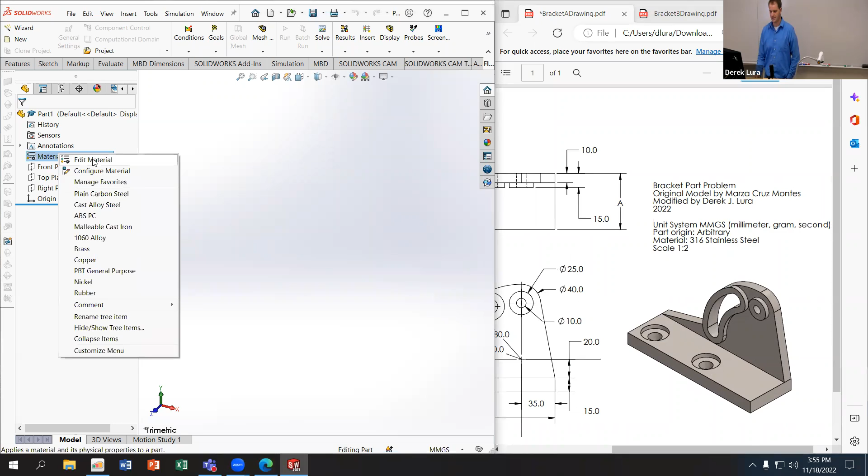That's great. I'm going to go ahead and change my unit material to stainless steel. I just want to get those things out of the way as early as I can. It doesn't say if it's sheet or bar, but they have the same density, so I don't really care. I'm just going to use bar. Makes more sense than sheet in this case, I should say.

I'm also given an ABC dimension inside the quiz, so whenever you're given that, you definitely want to use your global variables. I'm going to go into equations and specify that A is 55, B is 170, and C is 15. If you wait and do that later, you're going to suffer because you won't have the dimensions when you want them. That's all the setup that I need.

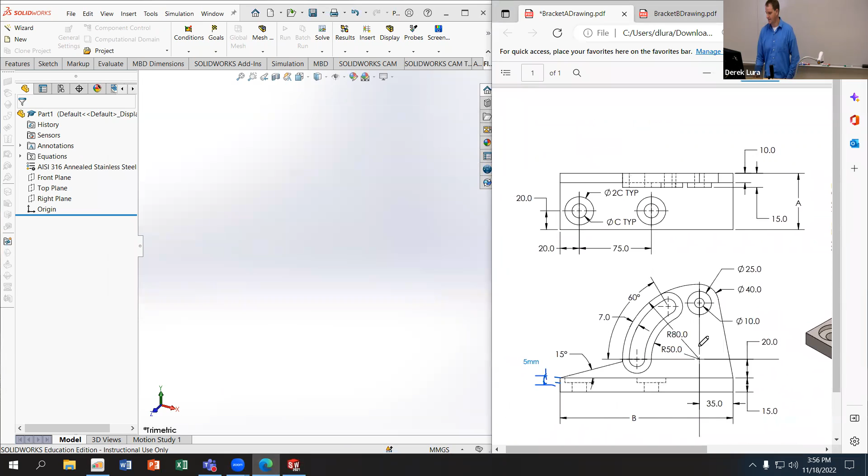I like to start by making very simple geometries. In the bottom here, I have a box that is B by 15 by A.

I'm going to go to the front plane and sketch. I'm going to use a corner rectangle to draw the width, and specify the width as B. So equals to—make sure you use the equals to. If I don't use the equals to, it's not going to save that as an equation, and I won't be able to update the dimension in the future, at least not automatically using my equations.

The height is 15, and I'm actually going to go through and mark these off as I get them, because I don't want to use the dimensions more than once if I can. I'm going to extrude this to a width of A, so equals to A again. In this case, since I don't have any symmetry here, I'm not going to bother changing this to midplane. I know I want all those back walls to line up, so I'm just going to leave that as a blind extrude. Again, I'll mark off the A on here.

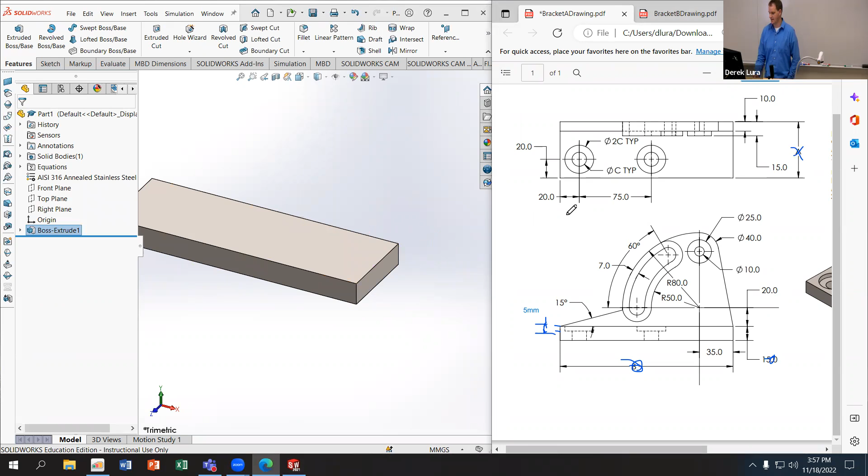Then I'm going to start working on this upper, more complicated geometry. I'm going to go back to the front plane and sketch on the front plane. I'm going to start on the left side and just work my way across.

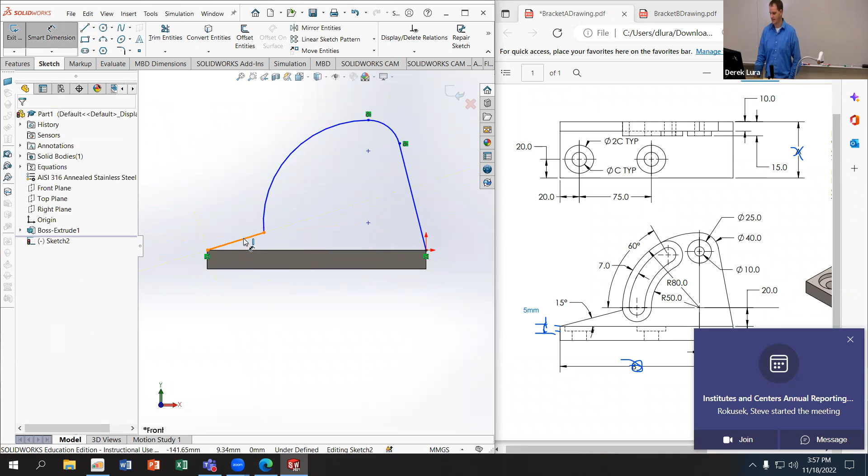So starting with the line tool, coming up, I'm going to try and transition to the arc. There's an arc there. I'm going to try and get to another arc—there's the other arc there. And then I'm going to come across to close that off. That's the basic shape. I have the 15 degrees here, so we'll get that. Mark that off.

I have an outer radius of 80, so I'm going to specify that this radius here is 80. I've got a smaller radius here of 40, so I'll specify that as 40. I do want to try and put these dimensions in the same spot as they are given to me in my drawing. It makes it easier for me to check and see which ones I've done and which ones I haven't.

I've got the center of this arc specified. I've got 35 over and 20 up from the top of this rectangle, so I'm going to specify that the center of this one here is 35 over and 20 up. So try and get that here. Then I'll mark these ones off.

Let's see here, what else do I have? I know that one's 40. Oh, I know I want the centers of these two circles to stay lined up, and currently they're offset. So I'm going to try and get these two centers to line up vertically, and I know that because they're both on top of that same line there.

That says fully defined, but it does not look correct. What am I missing, or do I have something wrong? This is 40... oh, that's diameter 40. It should be radius.

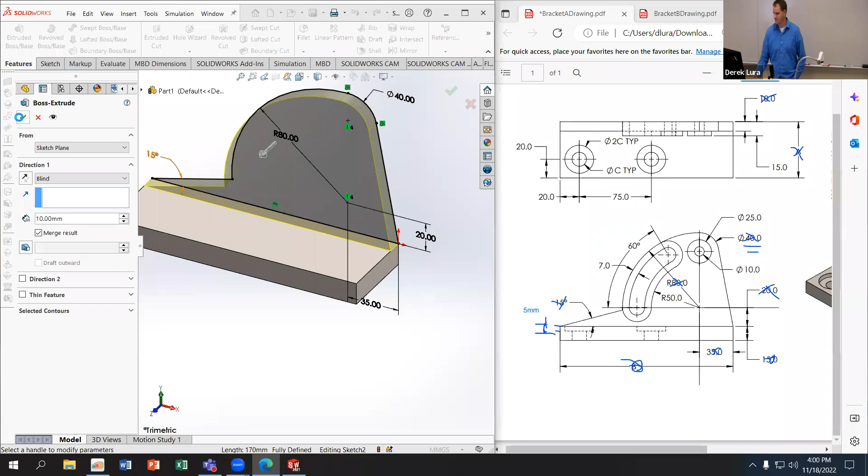I need to close off the bottom because this is not a closed cross section, so I'm just going to convert this bottom line. Then I'm going to extrude this to a width of 10 millimeters. Mark that one off there, accept that, and now I can start putting these slots and holes on here.

I'm going to go from the front plane again because I have this width is 15, so I want to be able to type that in without having to do any kind of math. So I'm going to sketch on that one.

This complex feature here is really just a curved slot, so I'm going to use a center point arc slot. I'm going to get the same center as where I started from, and I'm just going to draw this out. Oh, I want it to go the other way. Something like that. And then I'm going to add the relations to this to get it set up.

So this guy and this guy are actually co-radial, so I'm going to get that last arc and this arc here, and if it'll let me... there we go, co-radial. This bottom point is horizontally aligned with the center.

So I'll get those two points. I'll try and get the point first. Maybe let me do it that way. Doesn't like it, doesn't like to give me that because of the slot tool.

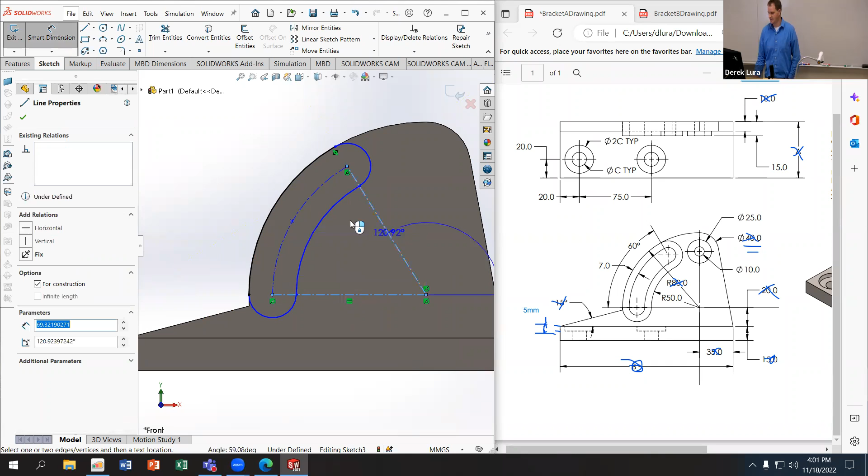What I'm going to do is make a center line that goes from here to here to here, and then I'll use that center line to allow for the horizontal relation. So make that horizontal. And then I also have a nice line there to use for this 60-degree angle. There's my 60, that's pretty nice.

This inner radius here has a radius of 50, so I'll specify that this is an R of 50. I already specified the 80, so I don't want to do that one again. There's my 50, I use that. There's my 60, I use that.

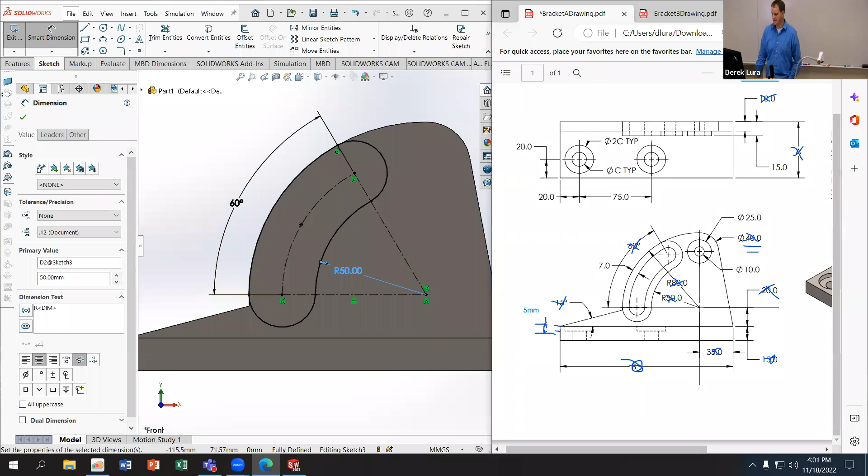Then I'm going to go ahead and extrude this to a height of 15. I'm going to go to features, extrude, 15 millimeters from the base, accept. I'm going to click on that, and I'm going to sketch on this face.

I'm going to do an offset of 7, and I'm going to reverse it so it's coming in. Then I'm going to use that to do an extruded cut, having it go all the way through. Again, the only dimension I use there is the 7. I can mark that one off.

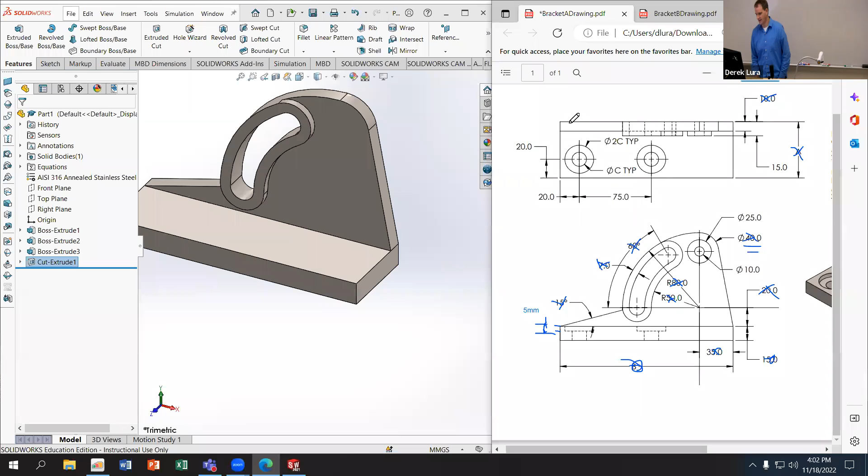I've got this hole up here on the top, same basic setup. Go to the front plane, sketch that hole. Actually, I'm going to sketch the outer portion of it first, again making this co-radial with this arc.

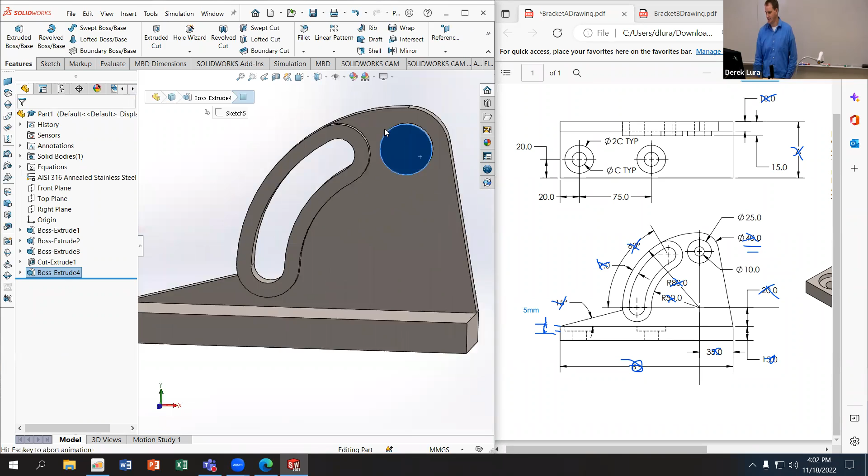15 again - remember that SOLIDWORKS is going to save your properties, so if you used an extrude of 15 on the previous extrude, the next one you do is going to be 15 by default. So if you can put all the same size extrusions in the same kind of timing, it's going to make it easier for you to save a little bit of time there.

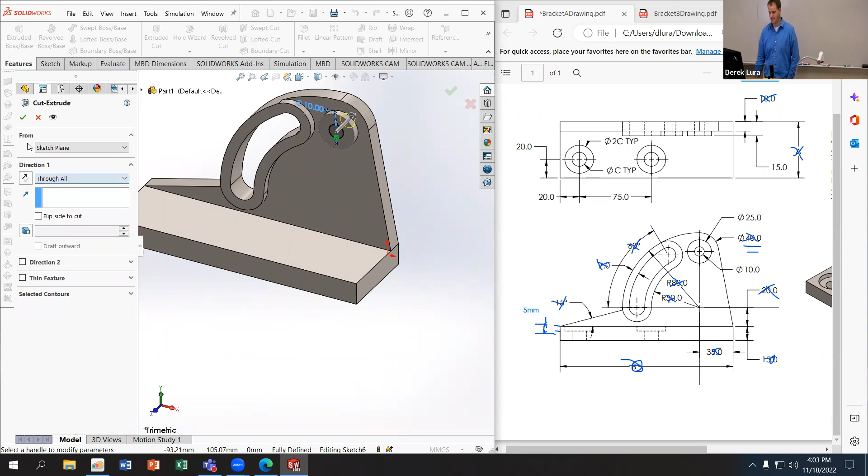And just sketching that hole, cutting the hole out. Then I'll do the bottom circles here, so I'm going to sketch that. I'm going to do a circle 1, circle 2.

Specify the positions of these. I didn't cross off my dimensions on that yet, so that's 20... 20. And 2 times C in diameter, so it equals the global variable C, oh not B, C times 2.

And then I'm going to make the other one horizontally aligned with that and equal in size. That TYP means it's typical - it means that's the typical size of that part. So if you see typical and there are two features that look like they're the same, then they're the same.

I'm going to cut extrude these to a depth of 5 millimeters, which I didn't actually include on the drawing - apologize for that. And then I'm going to sketch on this new plane, and we'll get those concentric with my original circles as well.

And they are going to have a diameter of just C, so that equals the global variable C. I'll make them both equal as well, rather than adding the same dimension twice.

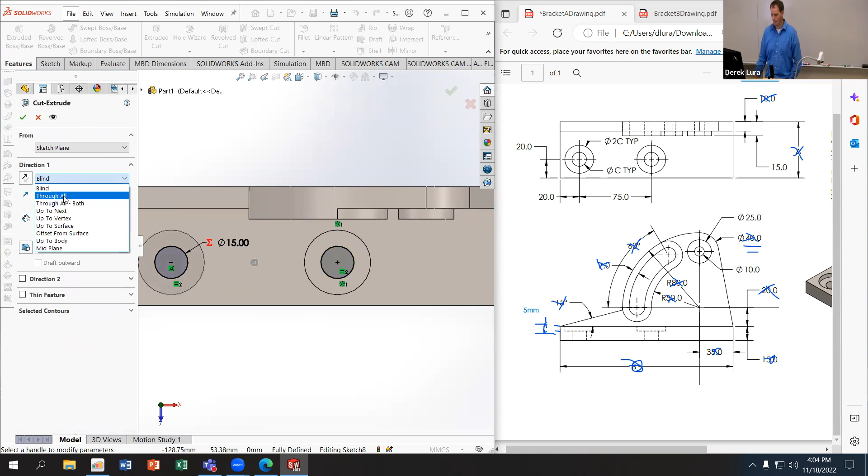So again, I've got the C dimensions here, the 20, the 20, the 75. I know I'm not being very good at marking these off as I go. The 15, the 25 for the outer circle there, and the 10 for the inner circle there. I've used all my dimensions. I've got my part done.

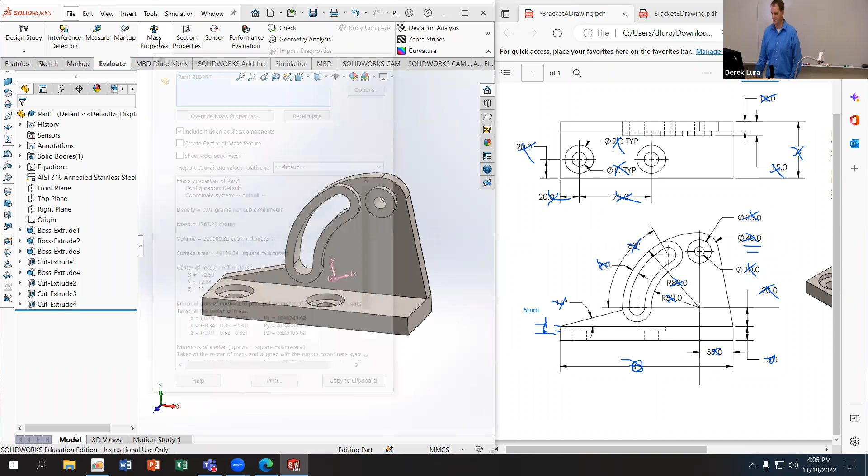I should be able to evaluate mass properties, and I get 1767.28. And I can compare that to the options. Looks like it matches one of them.

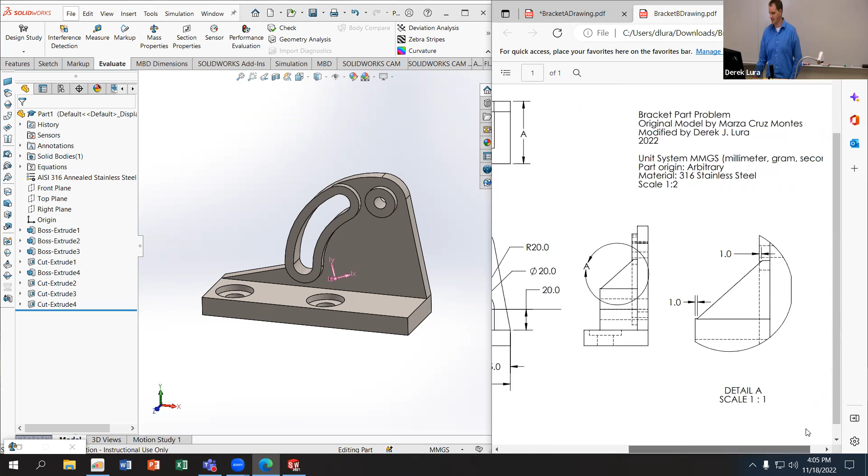Go to the next part. So I'm going to go back to the new drawing. We're just adding a feature to this, and we're changing our ABC. So if you're changing ABC, check that first - this is going to be the first thing you want to do, just so you don't forget.

Because once you start modifying the part, it's very easy to forget to go in and make some changes. So I'm going to change this to 184 and 10. You guys will all get different values for B.

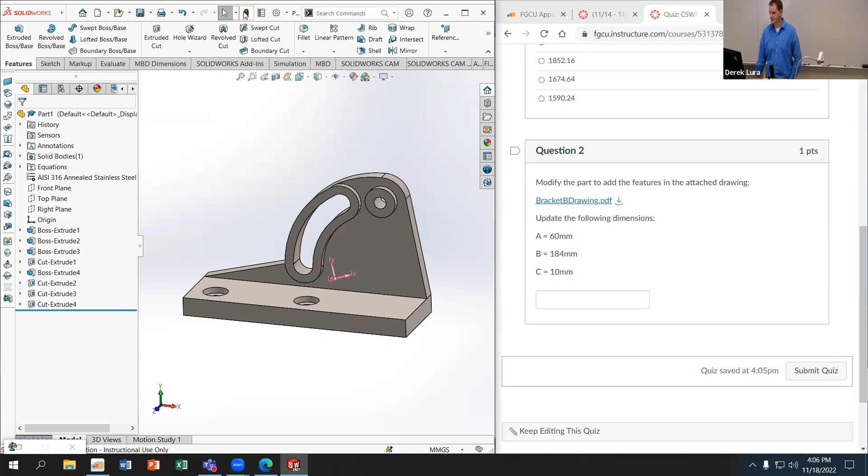So don't just type in my values if you're following along. I'm going to rebuild this, just so I know those changes have actually been updated inside the part, and we should see it change size a little bit. And then I need to draw a tombstone shape.

on this face here. We've got it over 0.35, or 35, and up 20. It's probably in the same position as the center of this arc, but since we're given that dimension again, I'm going to go ahead and draw it again using those dimensions in case the intention is for those to be independent.

So again, on my sketch here, if I want to get my drawing tool out, I can mark these off. Not that one yet, sorry. Can I undo? Maybe not, I've got to erase. That one we haven't gotten yet. We got a 35 though.

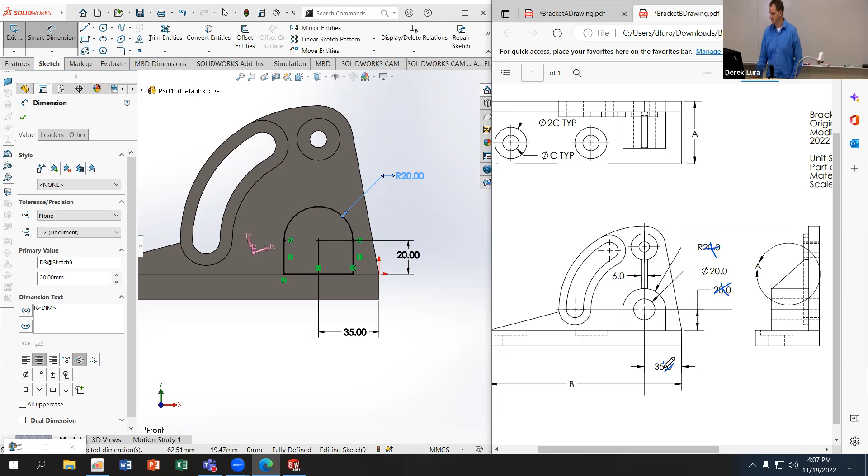That's good, and this is fully defined, so we're good. We'll extrude that out. I need a width for how far out that's going to go, which apparently I don't have. It should be on this view. Did not do a good job making this drawing for you all.

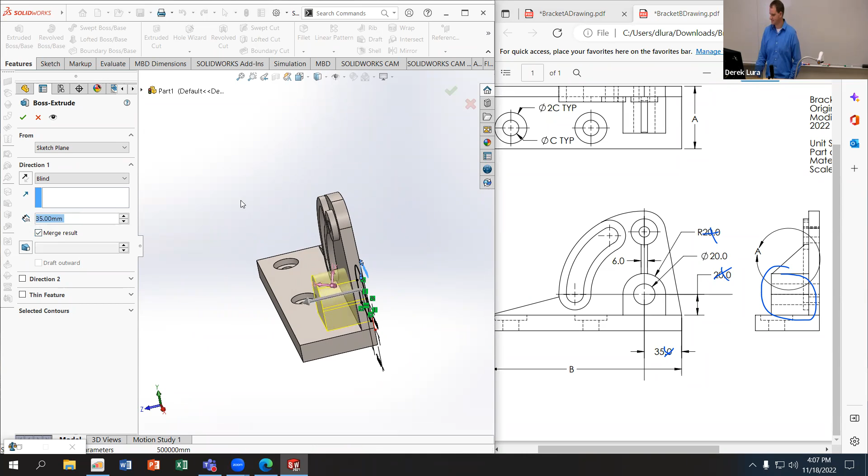30? 35? I don't remember what that's supposed to be. Looks like it should be a little bit longer than that. Let's say 40.

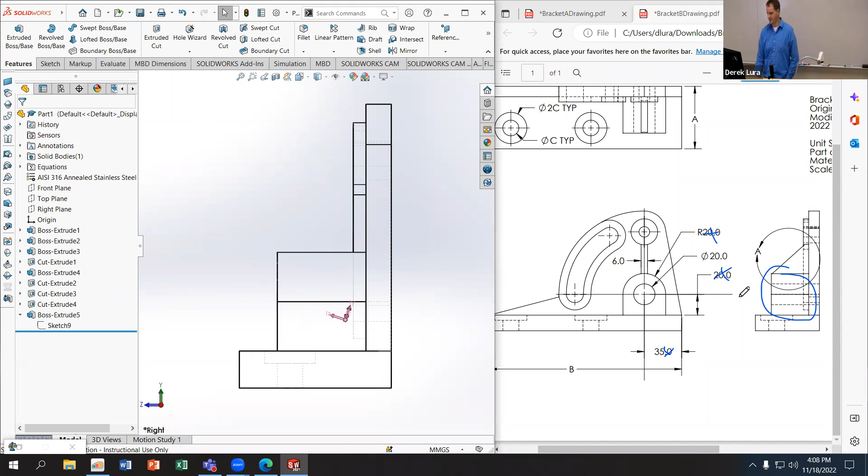I can verify my dimensions are close using this side view. So if I go to view planes, this one should look like that one. Looks like that's not quite enough. It's probably supposed to be 45. That looks like that's right. Maybe it's 42 or something, but it's close to that. You can see where the line would intersect with that hole on the background here.

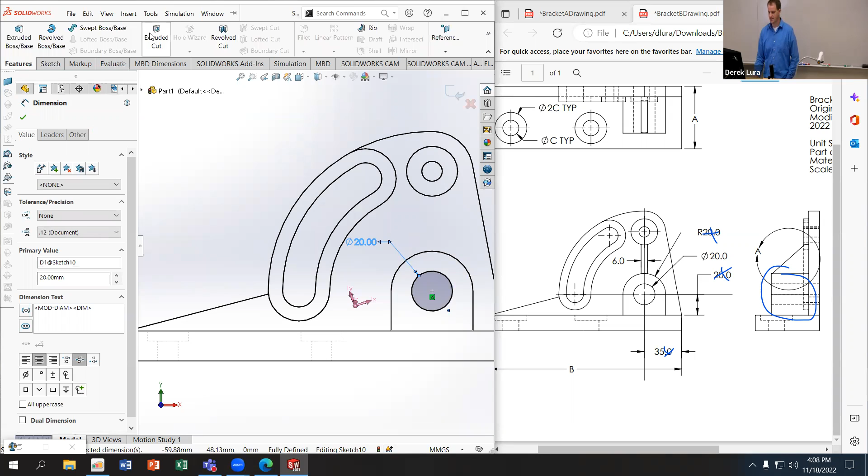I need to update that to give you guys better drawings. And then I'm going to sketch on this front plane. I want to get that center circle - it's going to have a diameter of 20. And I'm going to use features, extruded cut, and through all.

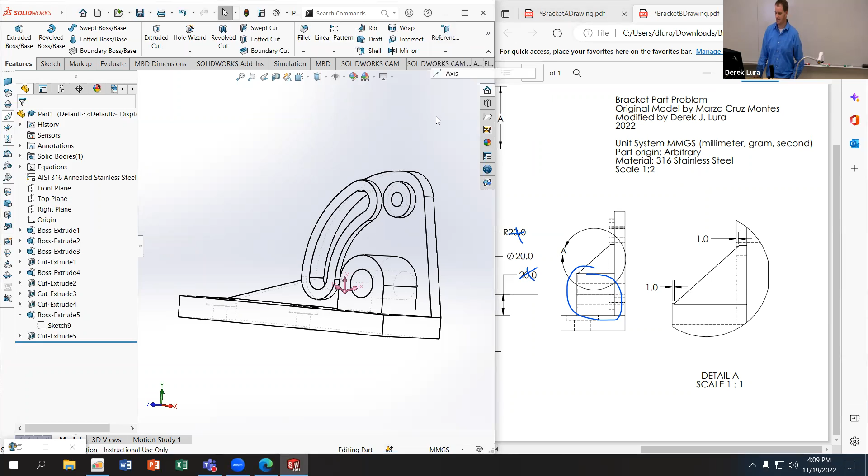First thing I'm going to do is make a reference plane that goes to the center of that. To get that, I'm going to use an axis that goes to the center of that circle. I'll change back to a 3D view, make it a little easier to see. And then I'm going to use a reference plane that is parallel to my right plane, but also goes through this axis, which gives me a plane that I can draw this line on.

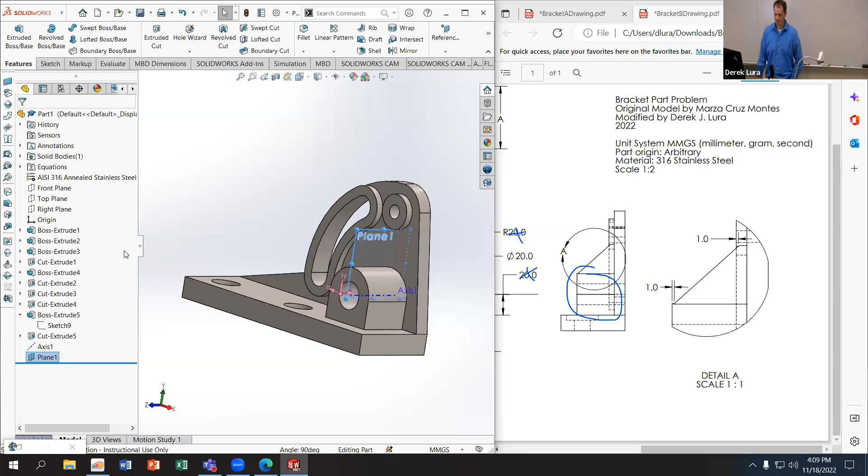And then I'm going to sketch the line with a little bit of an offset to the start and end of these circles here, and I'm going to set the distance of that offset to 1 millimeter.

And then I'm going to go into my rib tool and specify a width of 10 millimeters.

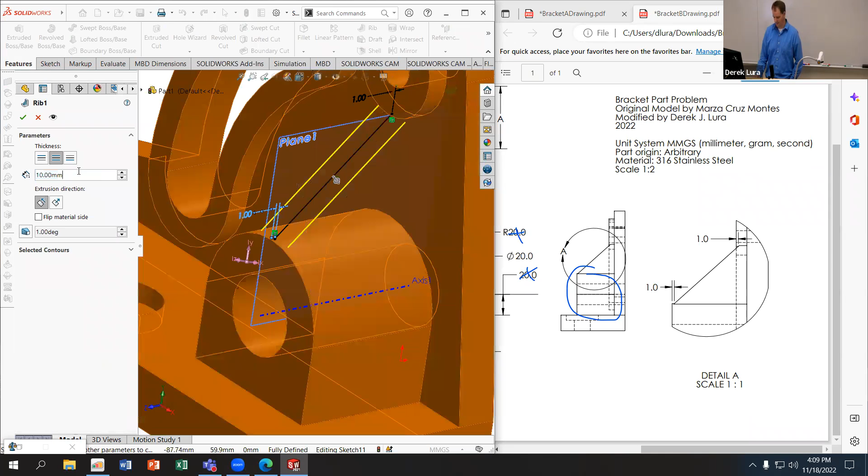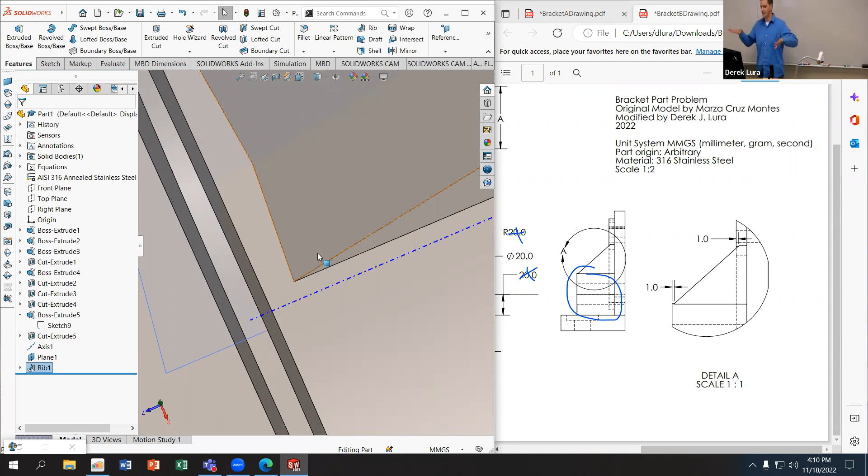Now, when making this part, I think the original intention from Marza was to have this come up to the edge. The reason that won't work is that, as you'll note on the side here, it gets a little bit narrower closer to the top. This distance here is a little bit wider than this distance here. If I have that line come up all the way to the top, the extrusion for the rib is now higher than the surface it's trying to go out to, and you can't resolve that geometry.

So I need to make sure that these ribs start at or below the surfaces that they're adjacent to. Otherwise it won't work. I noticed that in Marza's example that she submitted, she actually had that feature as a separate part that was extruded, and it wasn't merged with the original geometry of the rest of the components, so she wasn't quite getting what she wanted out of there.

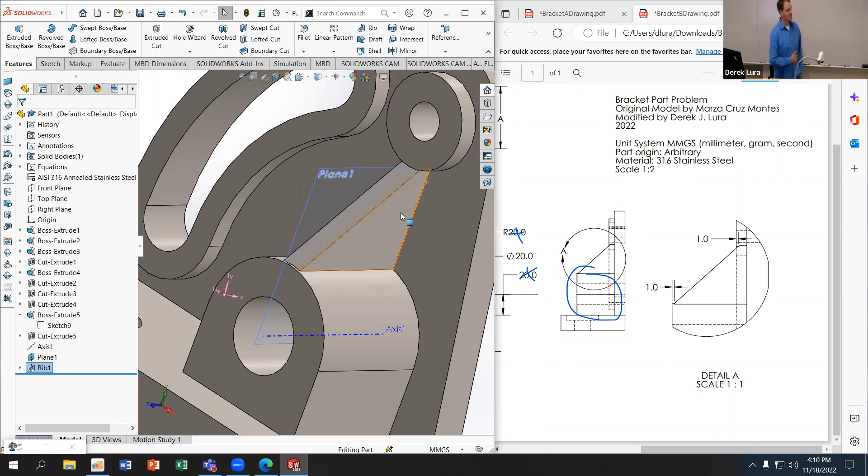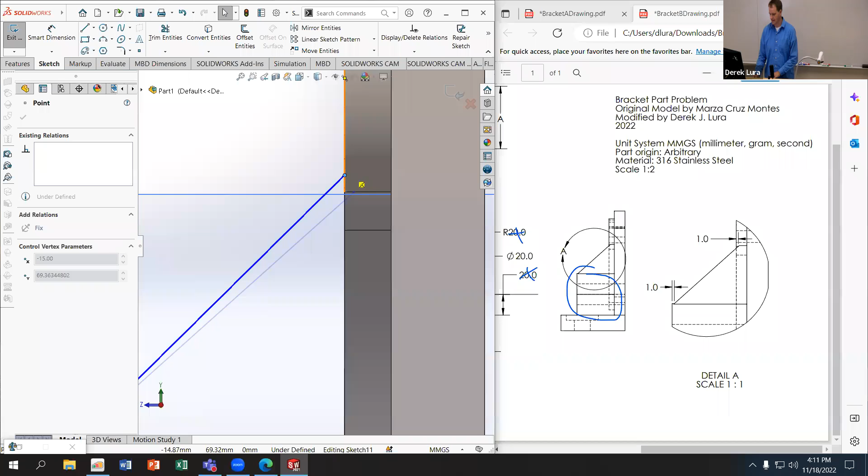You can have this come on top of this surface here, as opposed to coming onto the side of this one, and that would work fine. You would just need to know how far up onto that surface you wanted it to go. So if I wanted to do something like this, that would be fine. But I need to make sure that edge doesn't cross that point there. I hope that makes some amount of sense to y'all.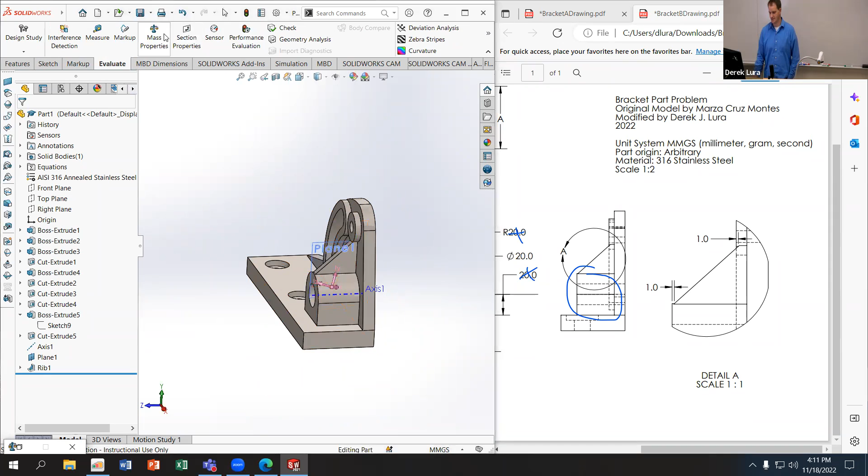I don't know if my offset here is right, but I'll go and evaluate anyways. I need to repost this with some updated geometry. I got 220909, let's see if I get it right. If you didn't modify, that one was 35. If I didn't modify it, that would be right. It says I'm wrong. Yeah, I did modify some. That one was 35. If you didn't modify, that extrusion was...

So any questions on any of the features that we used there?

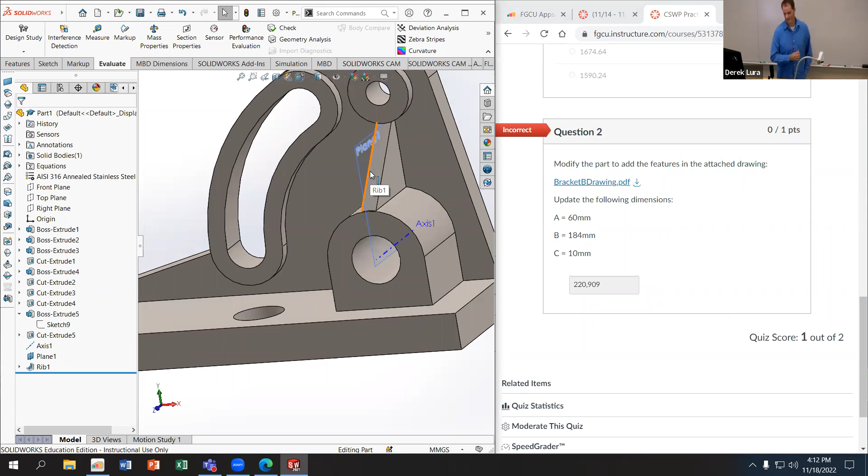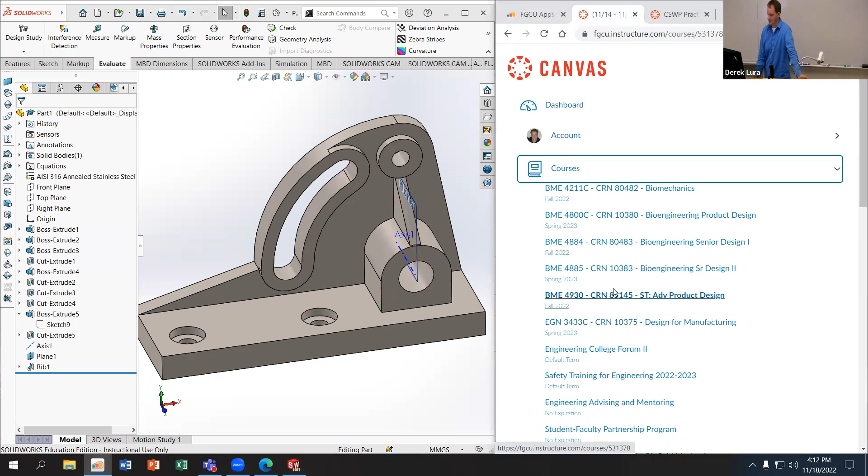I'll also note that the way that I made this is not the way that I made it when I made the part initially, looking at Marza's drawings. And that's okay, I wanted to do this a little bit more step by step when I was doing it for you all. But if I want to, I'm trying to figure out how to get to files in here.

If I want to put a bunch of the geometry all on the first sketch, I can do that.

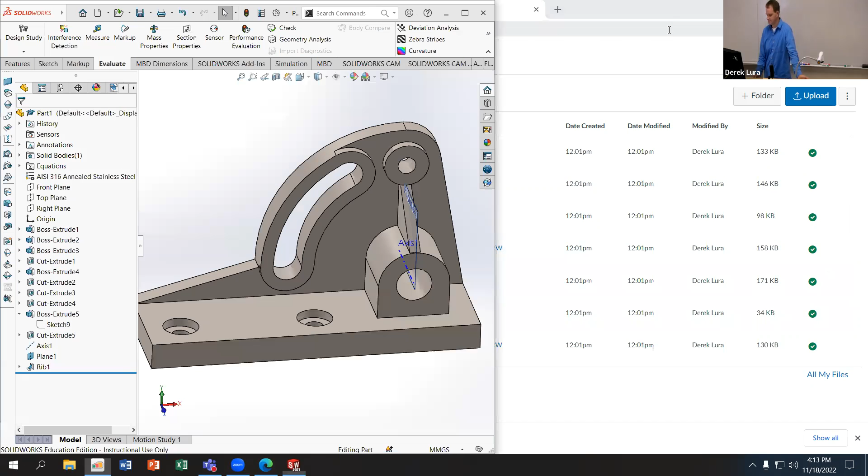So this is the same part, more or less. But on this one right here, that is the first sketch that I drew. It's got almost all of the geometry inside that sketch. The advantage of that is you have all the features inside the sketch that you can use as a reference for other things.

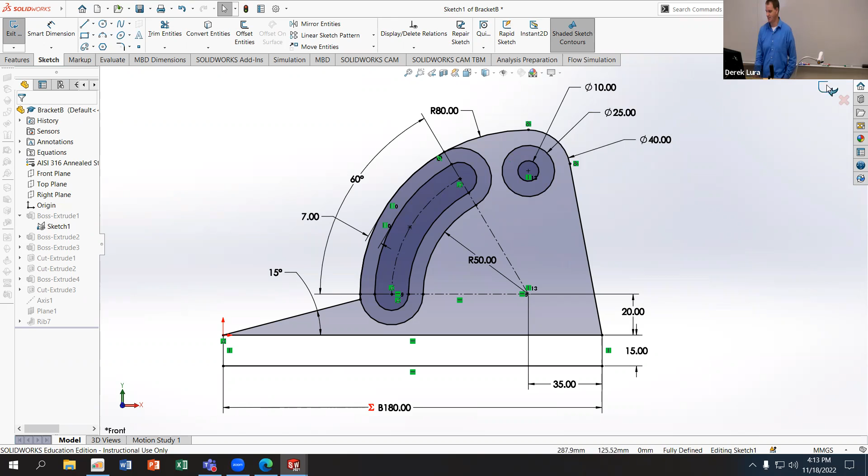So I still use all the same tools. I still use the slot tool, I still use the offset, I still used all the tangents and dimensions exactly the same. I just, instead of putting them into separate sketches, they're all in one sketch.

The hard thing with that is that when you do the extrusions, you have to tell it which contours you want to use for every extrude. So every one of these extrudes is using a different section of that sketch, and I'm putting them together in kind of an intelligent way, working from the base out, because they all need to be connected to each other.

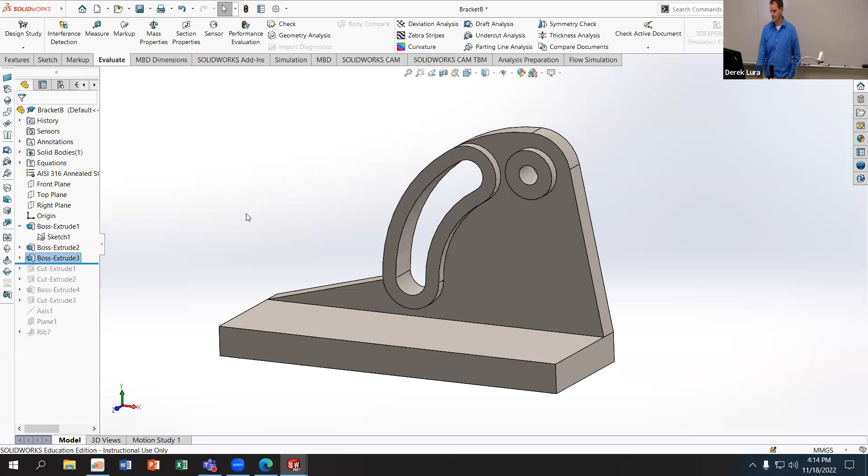You get the geometry that I want, and then the cut extrudes are just there. Again, the cut extrudes, I also did pretty much the same thing as I drew both circles, cut it out, and then cut it out.

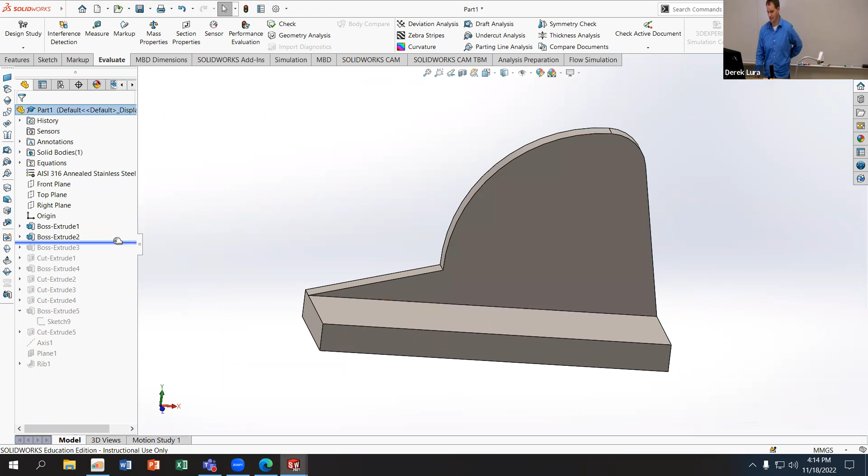A lot of times I don't recommend doing it this way, because this way is actually less resilient to changes in geometry than if you let the sketches be independently set up, with one sketch for one feature, like I did in the example here for you all, because there's less dependencies between the same part. You can kind of see how that builds out a little bit more logically than some of the models that I had on the previous one, and I don't end up with weird geometries as I'm going through the part.

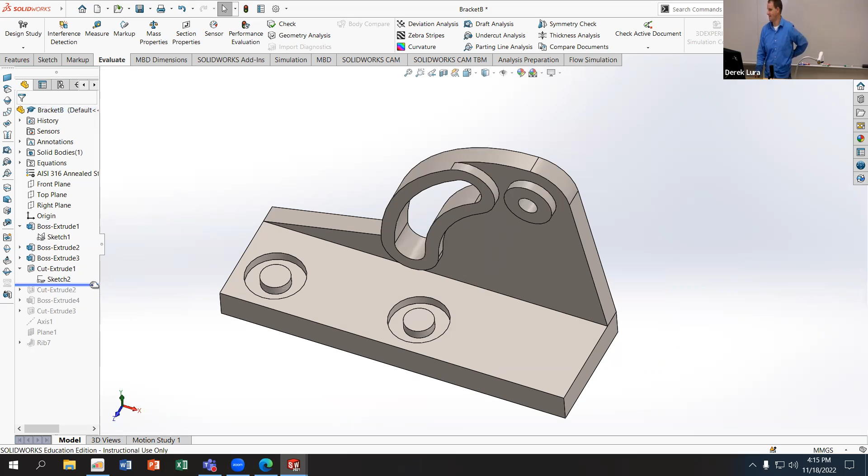Whereas on this one, I get some weird geometry because I have that donut cut without the hole cut out, and I have this back plate with the slot cut out on it before I get to the centerpieces. So there's advantages and disadvantages to using both those methodologies.

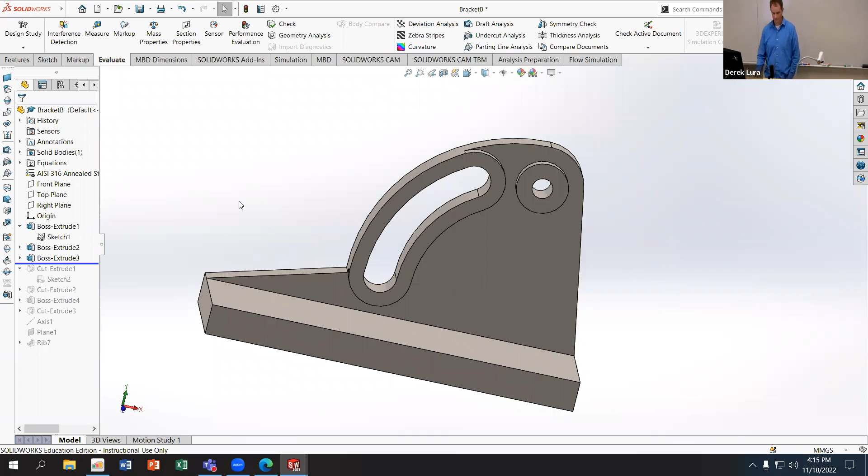One is not necessarily faster than the other either. I think both of them can be done pretty quickly. Does that make sense to everybody?